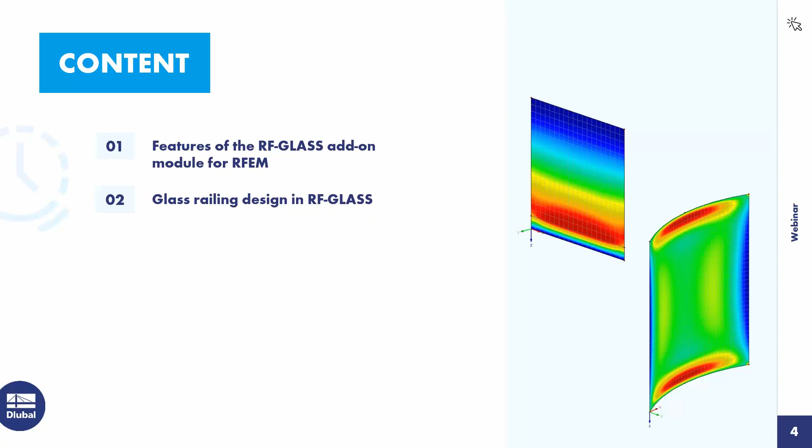To the agenda today. At first I will introduce some features of the add-on module RF-GLASS. Then I design a glass railing with the help of RFEM and the add-on module RF-GLASS, and then a curved insulated glass pane. So I start with the features of RF-GLASS. It's possible to design single layer, laminated and insulating glass, also curved glass. In the second example, I will combine curved glass and insulating glass.

You can consider the influence of the surrounding structure. I won't do that in this webinar. We did it in a previous webinar. There is a link here. If you have got interest in this webinar, point supported glass with the steel structure, you can click on the link when you downloaded the PowerPoint slide. Where you can find the PowerPoint slide, I will show you at the end of the webinar.

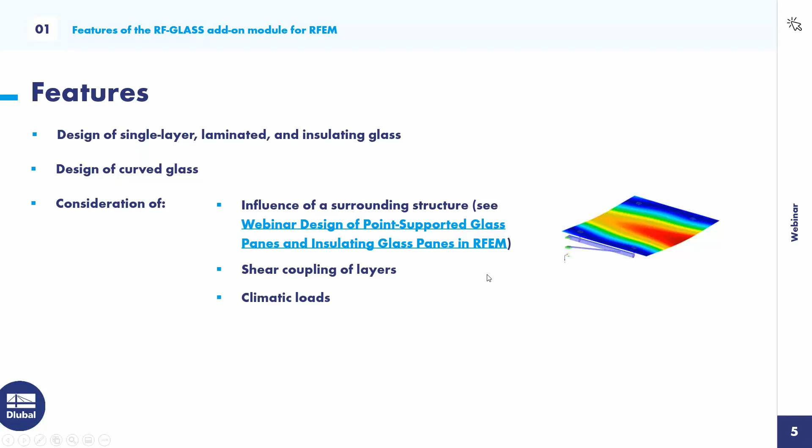So you can consider shear coupling of layers, climatic loads, for example, etc. And it's possible to do a stress analysis, the ultimate limit state design, and the serviceability limit state design. You can design independent from a code or with a code.

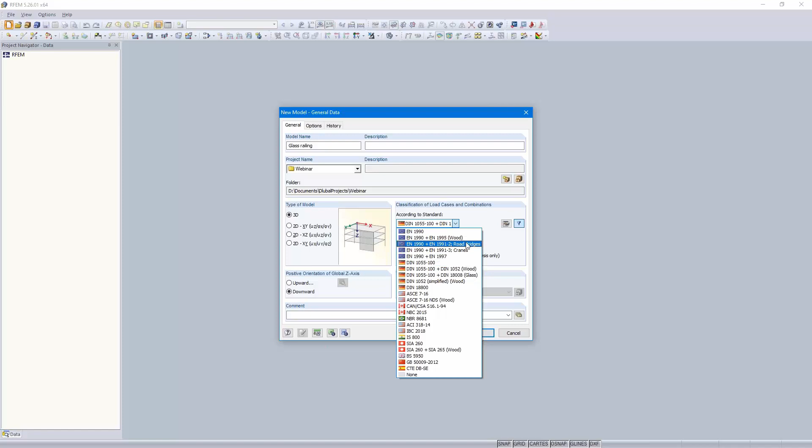So then we turn to the program. I start with a new model here, left above, new model. I call it glass railing. Then I want the program RFEM to create the combinations automatically. In that case, I would like to design according to DIN 18008. If you want to design according to another international standard, then use another standard for the combinations here, for example the Eurocode 0. Okay, that's all for the dialog.

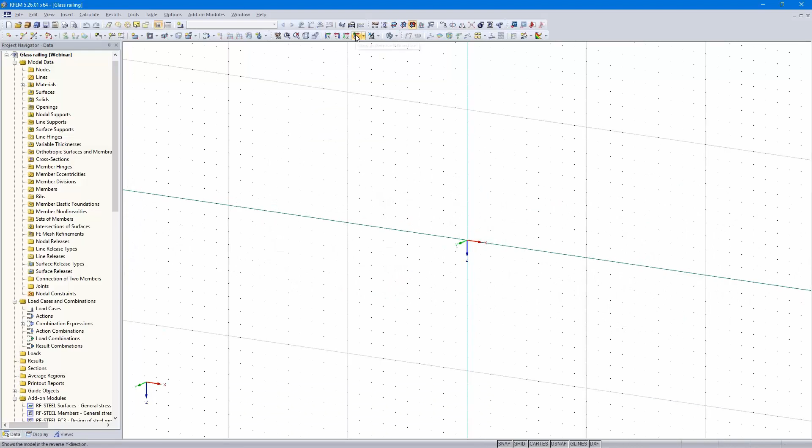I changed the work plane here right above to XZ and the view in -Y direction. So then I create the rectangular plate. The material and the thickness don't matter. They will be overwritten by RF-GLASS. Only the dimensions are important. Okay, 1 by 1 meters. Then I copy that line here in -Z direction, 10 centimeters. Later I will define line supports on that line and that line, and that's why we get restraint in that area here. Okay, the dimensions are okay.

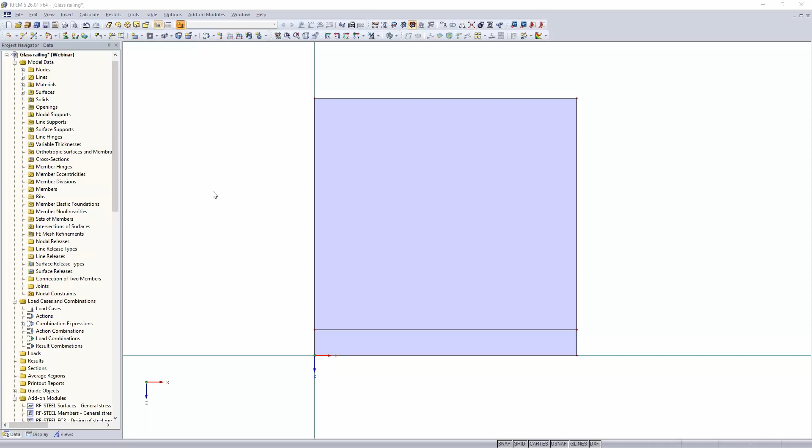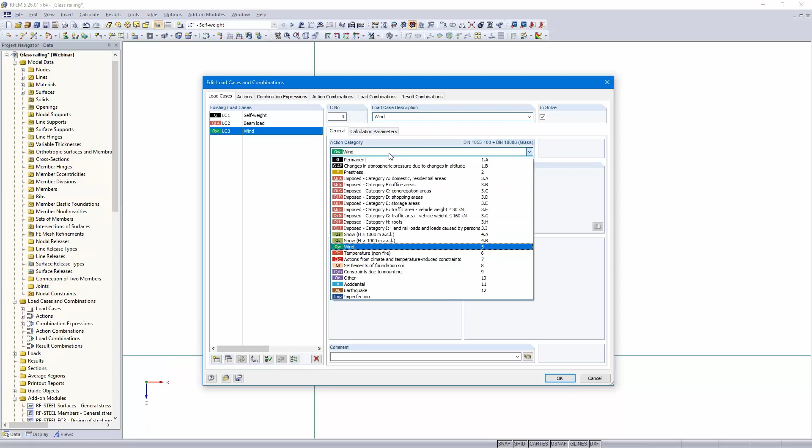Then I create new load cases. I start with the load case self-weight. Permanent is the action category. Self-weight is active, it's okay. Then the next load case, beam load. Yeah, imposed category, it is okay. And the next load case, wind. Action category wind. Yeah, and that's okay. Only 3 load cases, 3 actions.

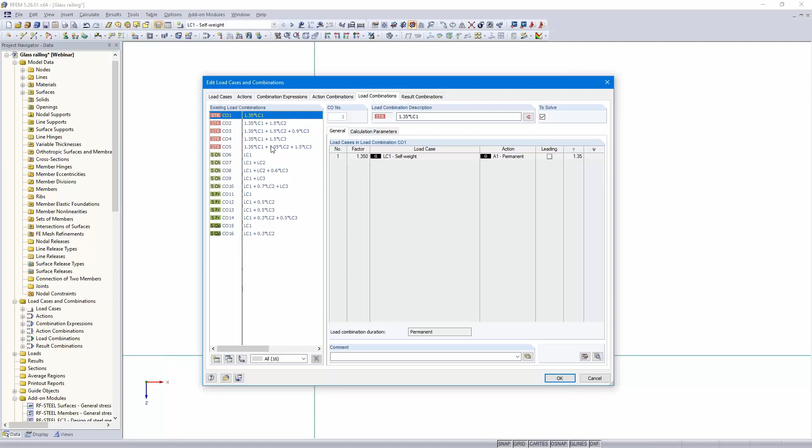Then here the combination expressions, 1 for the ultimate limit state, 3 for the serviceability limit state, action combinations, and the load combinations have been created, 5 for the ultimate limit state and the rest for the serviceability limit state. And all of them are combined in 4 result combinations, ULS as well as SLS 3 times. Okay.

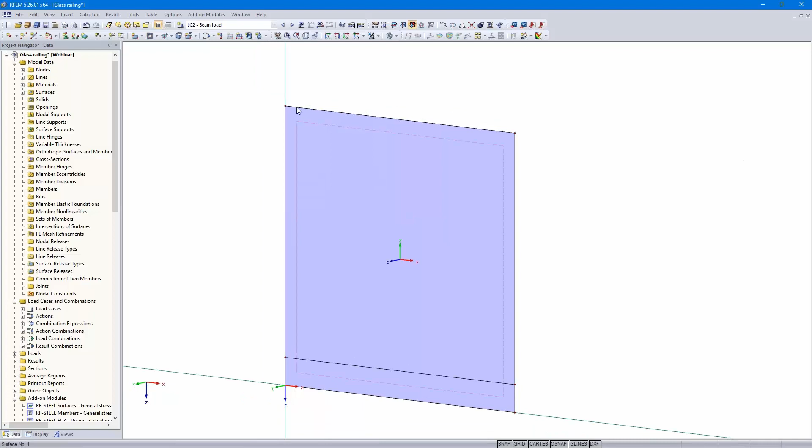That's all. Now we need to define the beam load and the wind load. Start with the beam load, the new line load in Y direction, 0.5 kilonewton per meter. And the wind load, the surface load in Y direction as well, 0.85 kilonewton per square meter. Okay, that's all for RFEM. We created the model, the load cases and 2 loads. And now we open the add-on module here under Others, RF-GLASS.

All surfaces, we've got only 1 surface. I would like to design according to the DIN code. And it's possible to design independent of a code. Then the existing stresses will be compared with the limit stresses.

Okay, then I select the result combination number 1 for the ultimate limit state design. For the serviceability limit state design, it's not necessary to design the serviceability limit state according to the DIN. It's not required for railings fixed on one side according to that code.

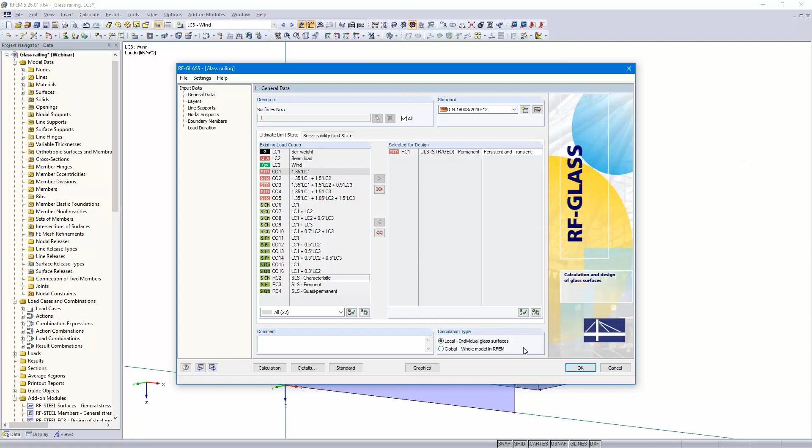Calculation type is local. We don't want to consider the whole structure in RFEM. We don't have any supporting structure. We use the local individual glass surface type. Then next dialog, the layers. For surface number 1, I start with the first layer, glass.

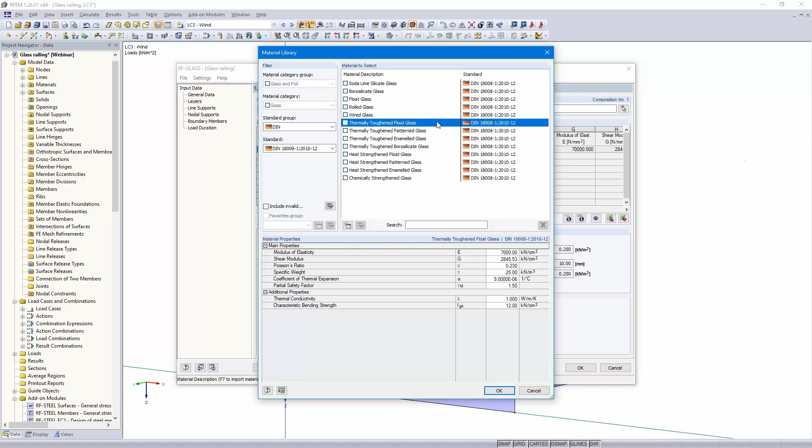I open the material library. Now there are a lot of glass types or materials. I use more than 1 in our webinar. For this example, I start with the thermally toughened float glass. And 10 millimeters is okay, thermally toughened and laminated safety glass.

Then next layer is the foil. I open the material library again and I use this one, PVB long time loading foil. Okay, the thickness is 1.52 millimeters, and the next glass pane. Okay, that's all.

The minimum requirements for an impact-resistant pane are fulfilled. Therefore, no pendulum impact test is required. No, we don't have to leave the dialog. I need to edit the composition details. It's possible to save created temporary models. I don't do that in this example, but in the second example.

I don't consider coupling. According to DIN, it's not allowed to consider shear coupling. But for other international standards, it's possible to consider shear coupling. So then, I forgot, I would like to activate the FE mesh refinement of 5 centimeters. And the rest is okay.

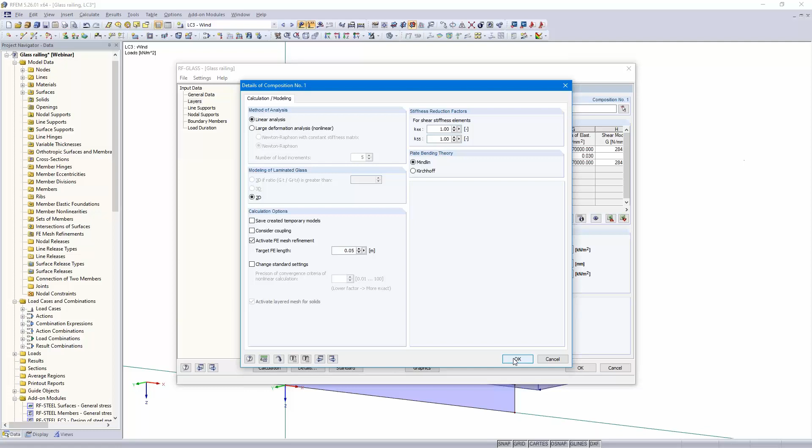So then the next dialog, line supports. I start with the first line, the bottom, okay. And I would like to support in all 3 directions. As you can see here, there are several support types, hinged types and rigid, and I use the user-defined type, not around Z direction, but in X, Y, Z, but with a spring constant of 10,000 kilonewton per square meter. That depends on the elastic support, for example, by the elastomer.

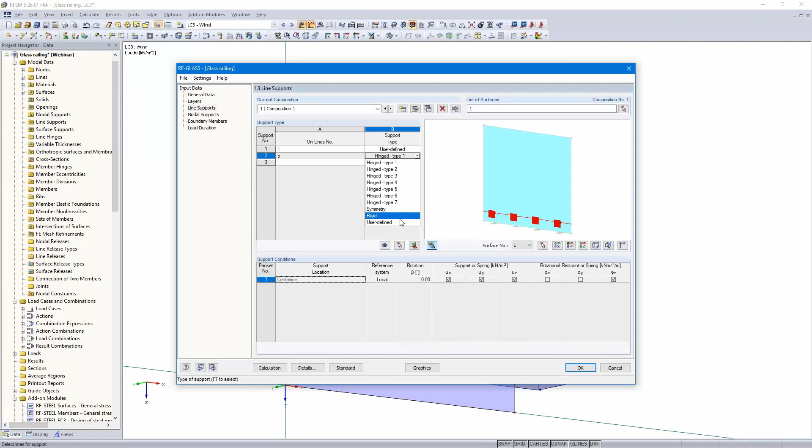Okay, so that's all for the first line. Then the next line, this one, and I would like to consider a horizontal support. That's why I showed the support axis system, and I would like to consider support in Z direction. The same spring. Okay. That's all for the line supports.

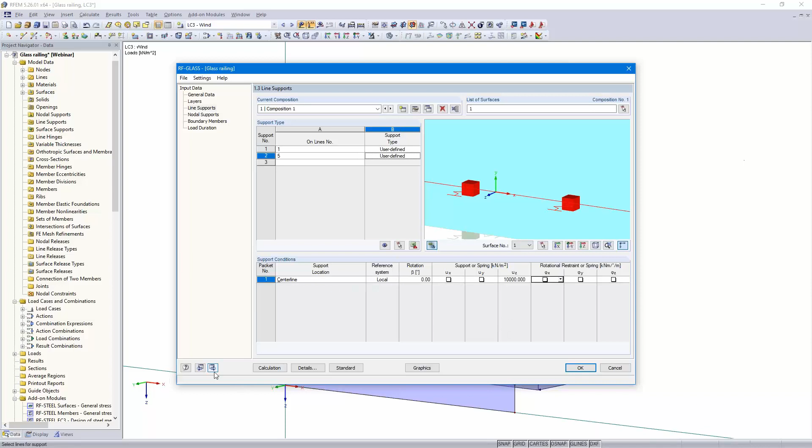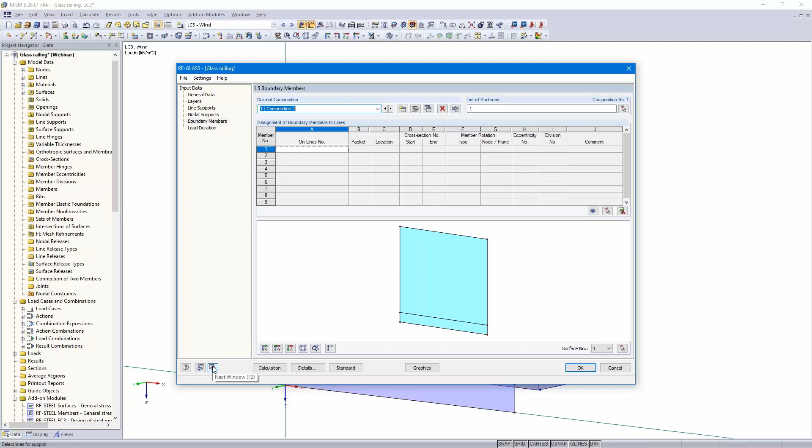Next dialog is nodal supports. I don't want to consider a nodal support in that example. I will do that in the second example. So then boundary members. It's possible to consider boundary members, for example, a handrail here. I don't do that. Load duration. The table is also filled automatically. So then we can start the calculation.

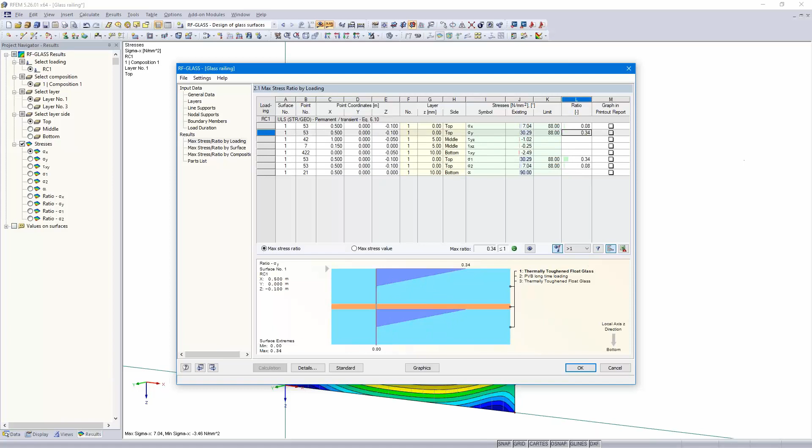So a design ratio of 34%. Let's take a look at the graphic. As you can see, the maximum ratio and the maximum stresses are in that area here, in the area of the restraint. Okay, we can print that in the printout report. Full page width and 50% of the height. It's okay.

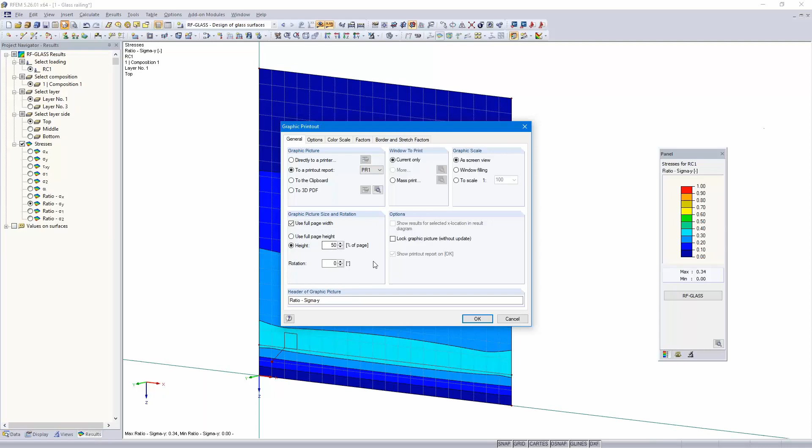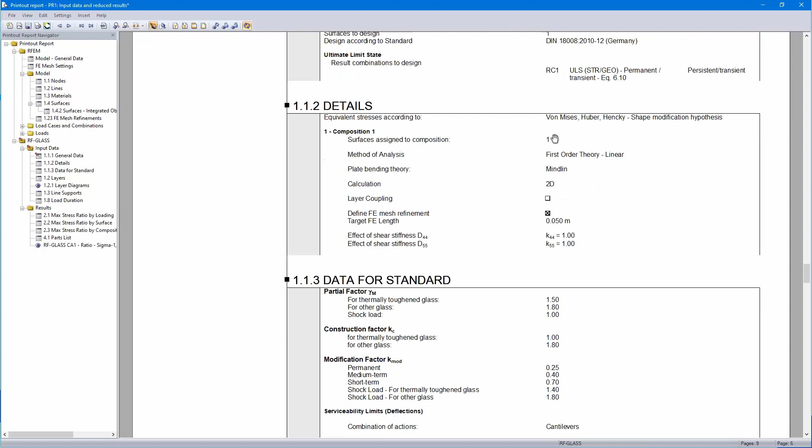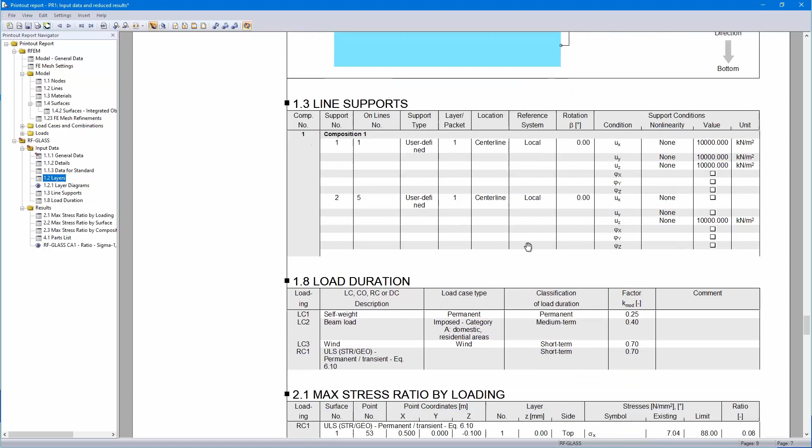So you can see the graphic here, but I would like to start with the general data of our glass. Here above, the standard, the result combination, details, the data of the standard. Important here, the layers with the material parameters, the layer diagram, the line supports, the load duration, and the maximum stresses. Okay, that's all for this model.

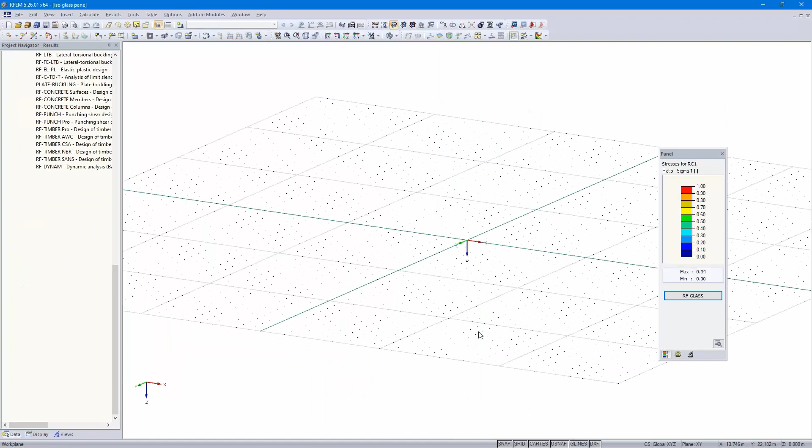I create a new one, the ISO glass pane. The same settings here. Okay, I change the view in Z direction. Then I change the grid by right-click here at the bottom, edit, to 25 centimeters. Okay.

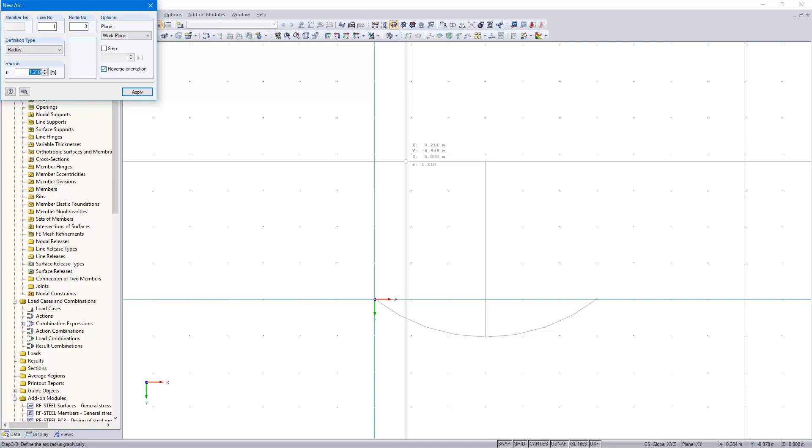So then here left above, an arc via edge nodes and radius. First point and the second point by 1.5 meters. Okay. I reverse the orientation and enter the radius of 1.3 meters here. Okay, that's the arc. And now I copy that line here in minus Z direction and create a surface.

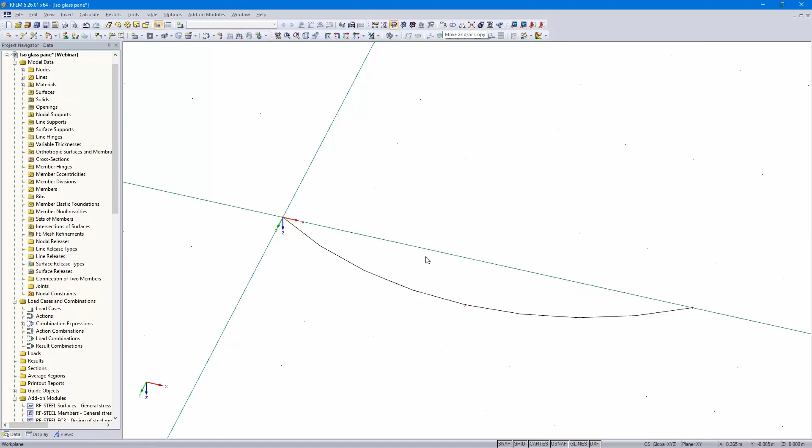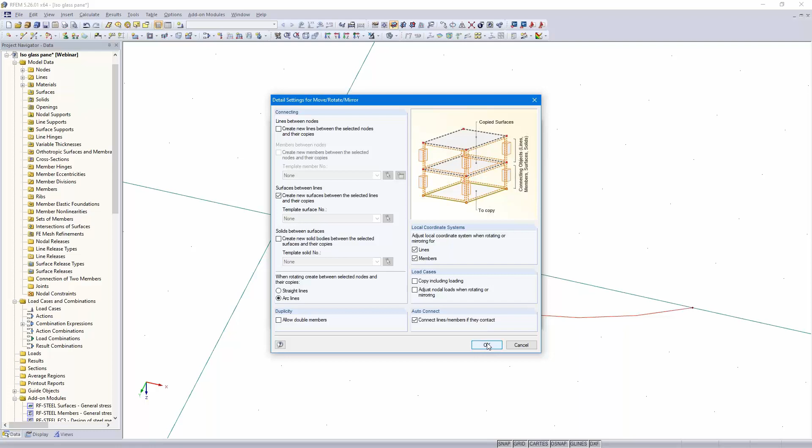So I select the line, then here move and/or copy. One copy in minus 1.7 meters, and I edit the expanded settings here at the bottom, and then I create surfaces between lines. Okay.

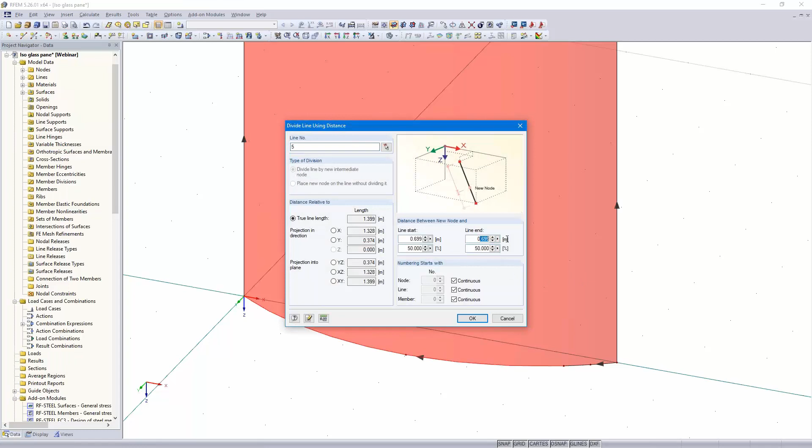Okay, then divide line by distance. Start 20 centimeters and end 20 centimeters. Okay, and that nodes here I would like to support. So then the model is okay.

I define the load cases. First the self-weight load case, then the wind. That's the right action category. Next load case, height difference. So I need to change the action category to changes in atmospheric pressure due to changes in altitude.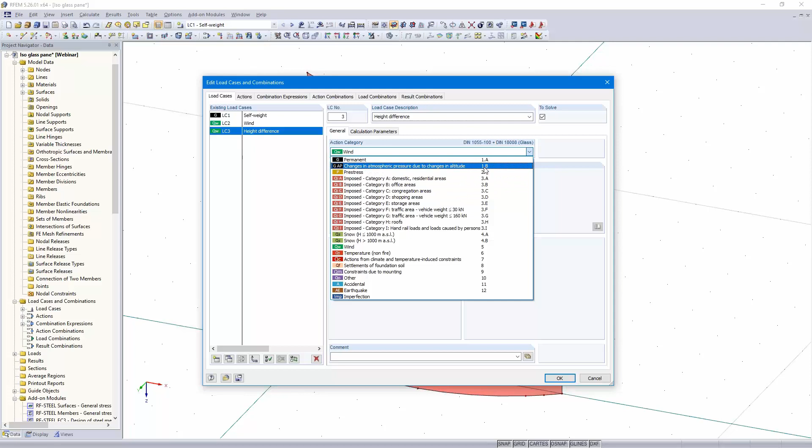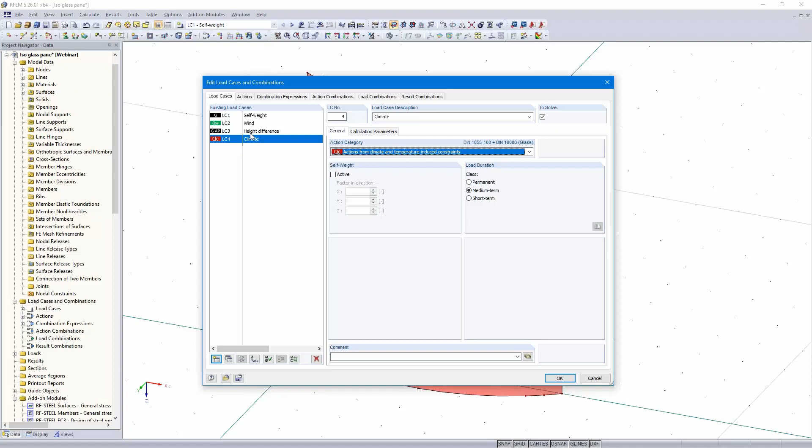So, and the fourth load case, climate. And then here actions from climate and temperature induced constraints. So when I leave the dialog, I don't have to forget the wind load, but the load cases 3 and 4 are placeholders to assign them in RF-GLASS. So the same combination expressions, then the load combinations have been created automatically, and the 4 result combinations.

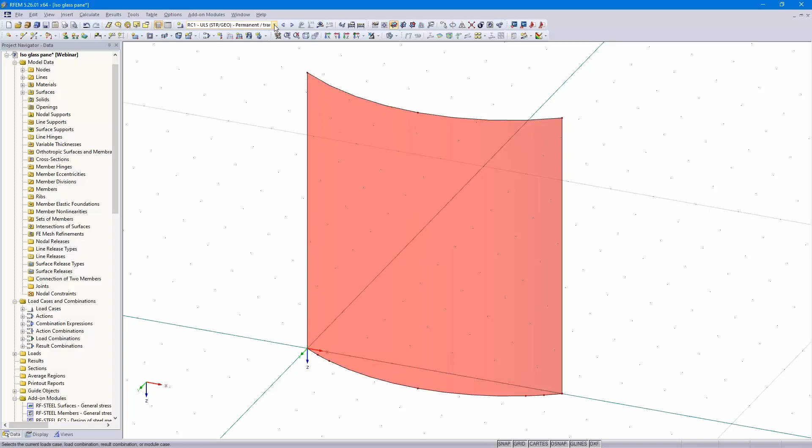So now I enter the wind load. So face load in local Z direction, 0.5 kilonewton per square meter. Okay. So that's all for RFEM. We can go in the add-on module.

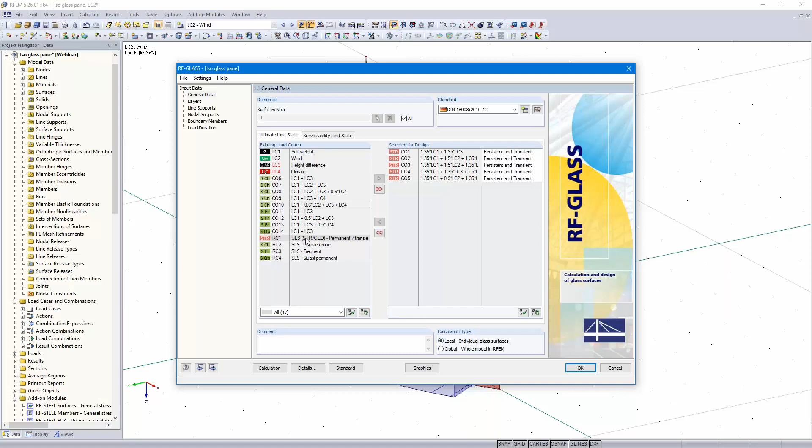So surface number 1, same standard. And I select the combinations for the ultimate limit state design. It's not allowed to use result combinations for insulated glass because of the explicit classification of the climate loads. So serviceability limit state design is the same. The load combinations for the serviceability limit state design. Local calculation type again, and we can turn to the next dialog.

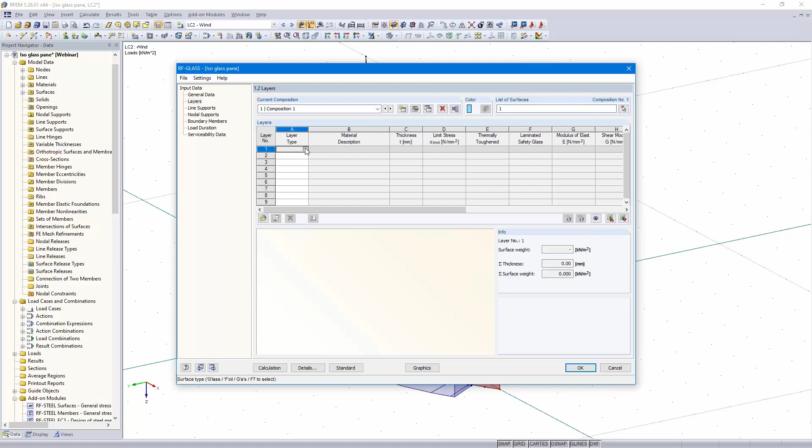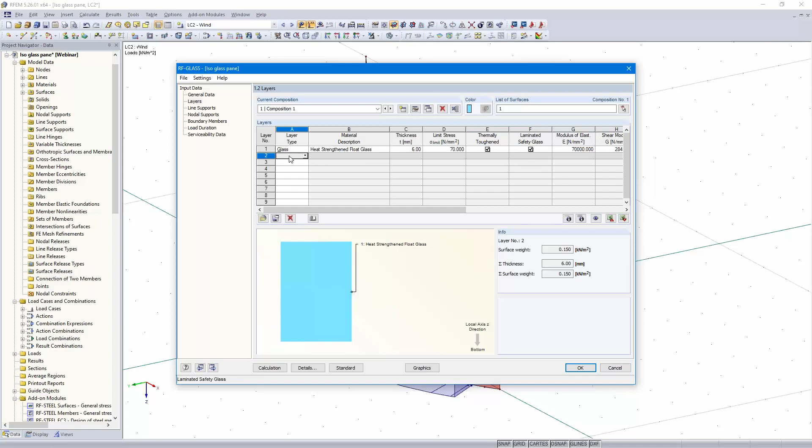The layers, surface number 1, and I start with the first layer, glass. This time heat strengthened float glass with a thickness of 6 millimeters, thermally toughened and laminated safety glass. So then a foil. This one is okay, but I changed the thickness. So next glass layer. Okay, and then the gas.

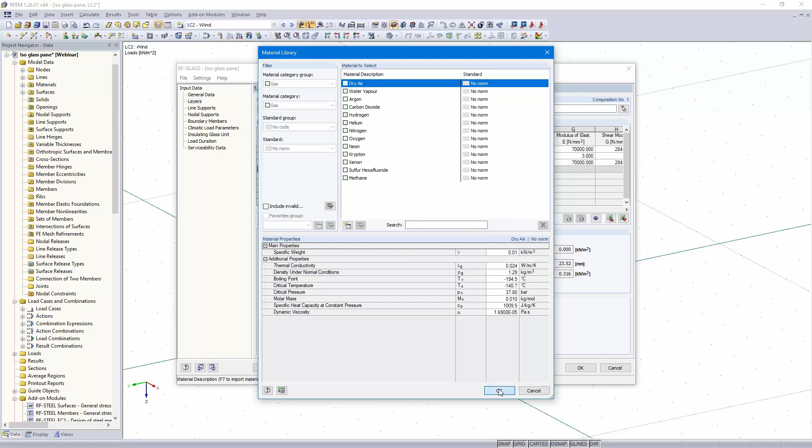Dry air is okay, but I would like to show you the material library. Dry air, but you can also use, for example, argon or krypton, etc. So thickness 16 millimeters. Then the glass in the middle. Float glass this time. 3 millimeters. And I can uncheck this. Then dry air as gas.

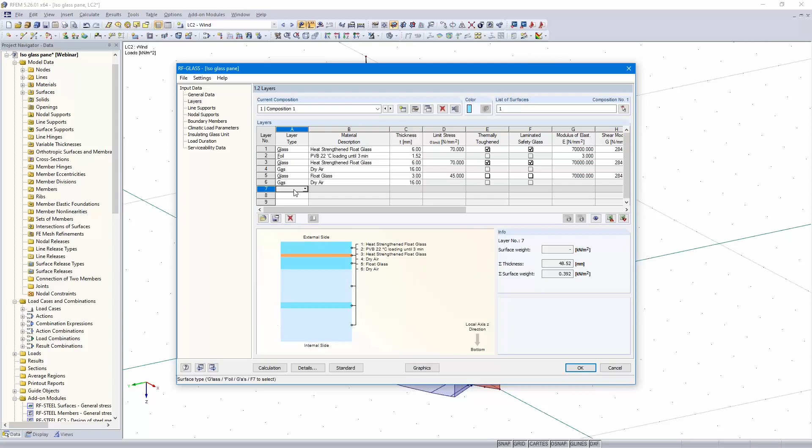Next glass layer. Heat strengthened float glass. The foil. And the last layer, the glass pane. Okay, let me check the entries. Here's the wrong thickness, 6 and 6. Okay. In the graphic you can see the single layers, glass, foil, glass, dry air as gas, glass, dry air, glass, foil and glass.

Okay, let me check the composition details. As I promised, now I save the created temporary models. I don't consider coupling again. I activate FE mesh refinement and I can deselect this. The rest is quite okay.

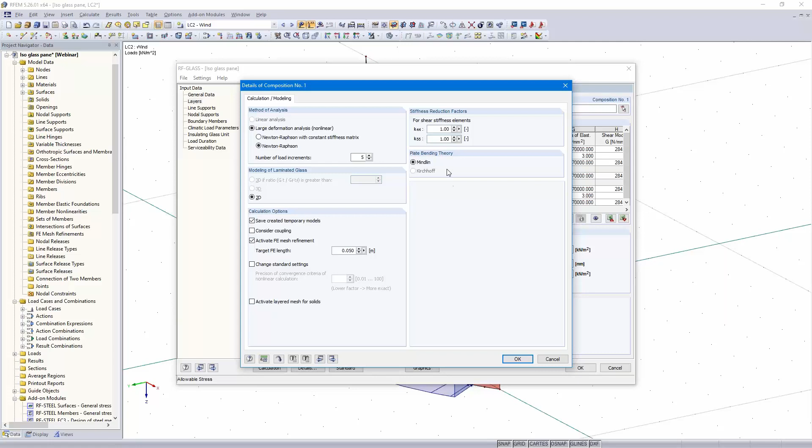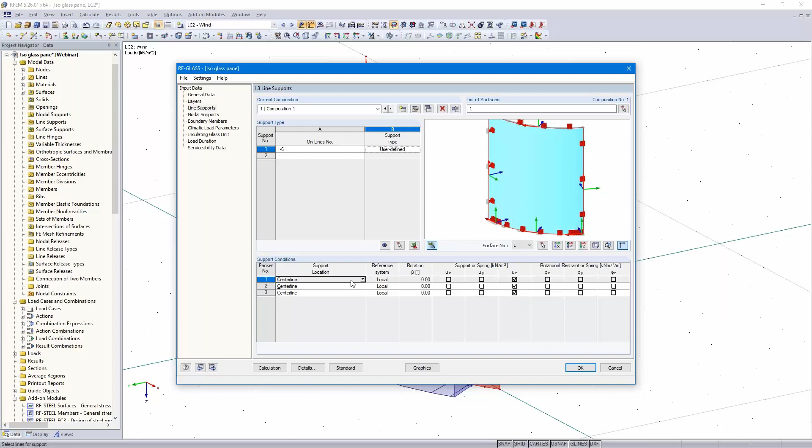Then next dialog, line supports. I would like to support all lines in horizontal direction. I select here user defined. In Z direction I would like to support. So, and we need to define this 3 times for this packet on the outside, in the middle and inside. Okay, that's all.

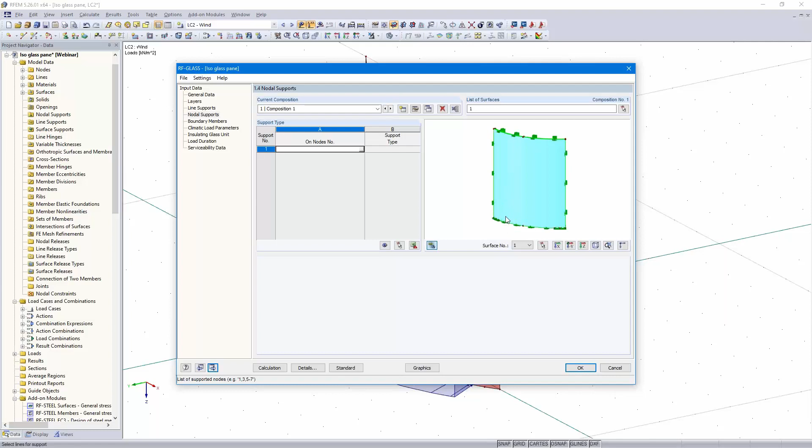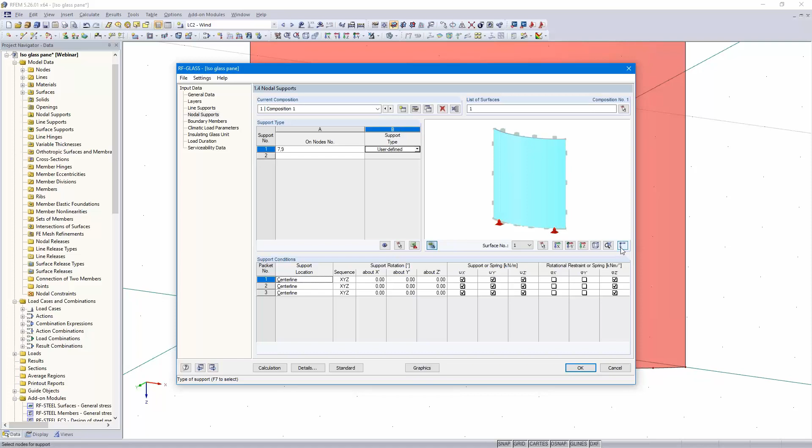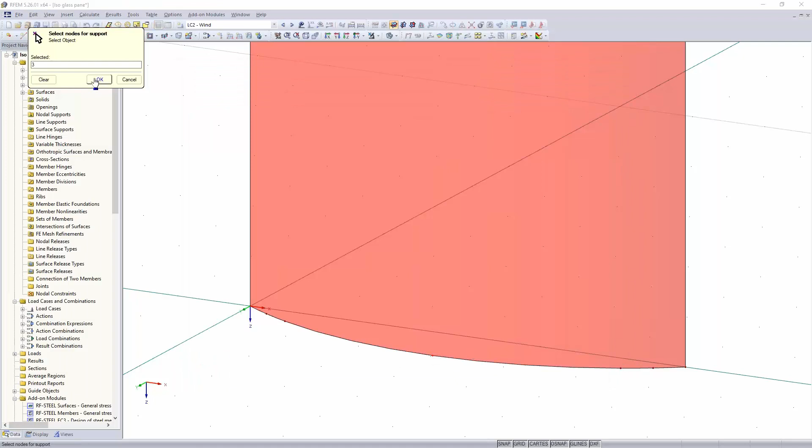Next dialog, the nodal supports. I would like to support the structure or the glass pane in vertical direction in these points here. So I select the first 2 points. This one and this one. User defined. In local Z direction. Okay, and the support in the middle here. Okay, user defined as well, and I would like to support in X and Z direction. Okay, that's all.

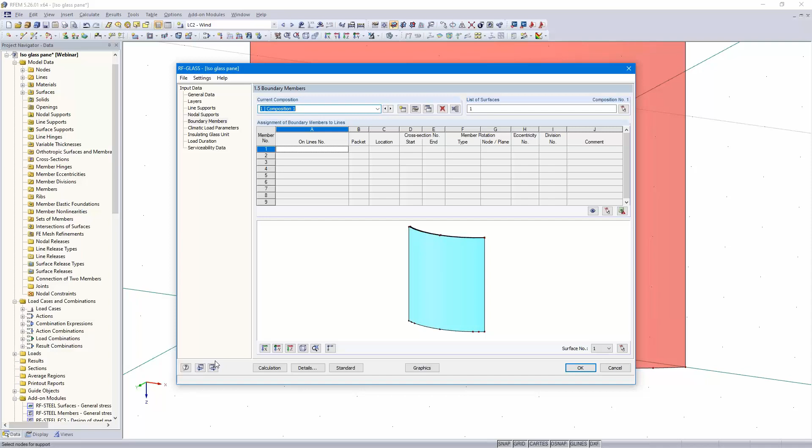Next dialog, boundary members. Yeah, I don't consider boundary members, but we need to define the climatic load parameters. The default values according to the standard are present. If you want to design according to another standard, then you need to modify the entries here. I only need to assign the correct load cases here. Load case number 4 and here load case number 3. Okay, the same for the winter.

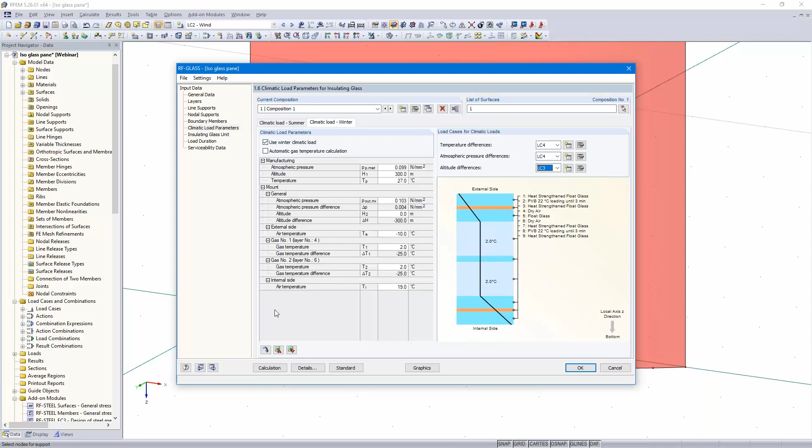Load case number 4, 2 times and 1 time. Load case number 3. So that's all for this dialog.

Next dialog, insulating glass unit. You can consider secondary seals here. I don't do that in this webinar. Maybe some words to this area or this table. Self-weight and climatic loads are automatically assigned in the right place.

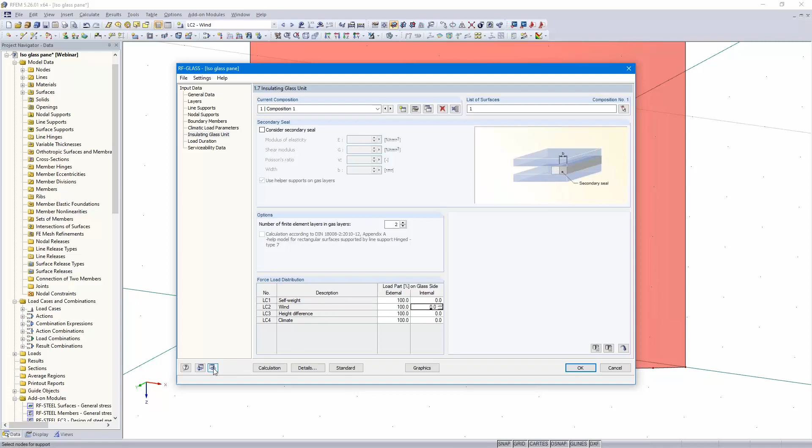However, if wind suction acts in addition to wind pressure, you have to define the load component here. You need to modify this value and this value. We have got only pressure from the outside, and that is why it is okay here. The load duration class is assigned automatically.

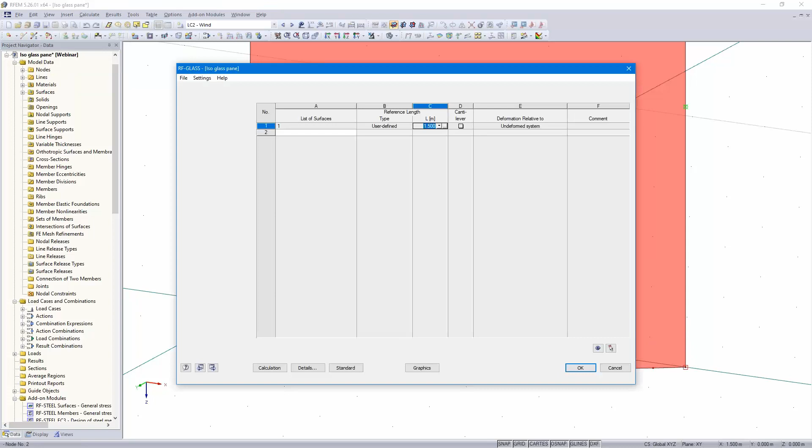Last dialog, the serviceability data, list of surfaces, surface number 1, not the minimum boundary line. I select user defined and I measure the distance, 1.5 meters. Okay, the entries are complete.

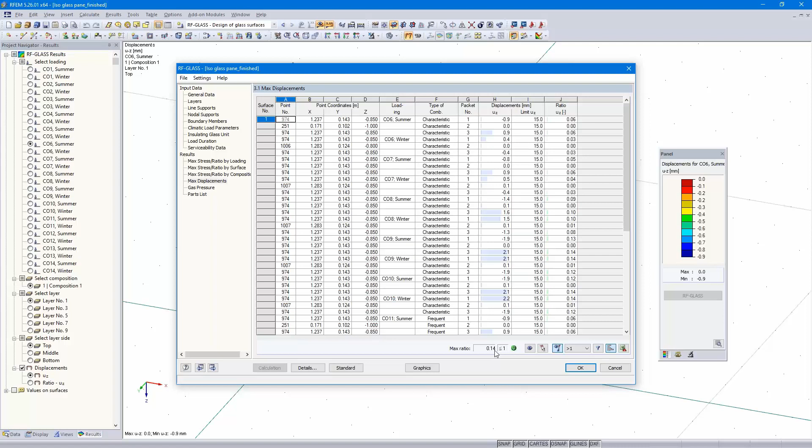I would like to skip the calculation time and open an already calculated model. I've got the maximum ratio of 92%. Let's take a look at the maximum displacements. Maximum design ratio of 14%. The glass pane is quite stiff.

So let's search for the maximum design ratio here, sigma x, and we open it in RFEM. As you can see here on the left side, load combination 5, winter, has got the maximum stress and the maximum design ratio here at the top and at the bottom, that area in layer number 1.

Now we can open the printout report again. Where are more data now? Should take some seconds. Might take quite long, maybe through the GoToWebinar software. So, okay.

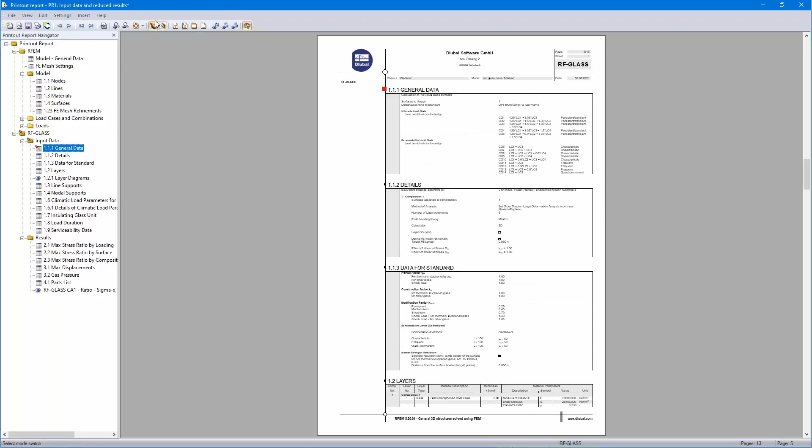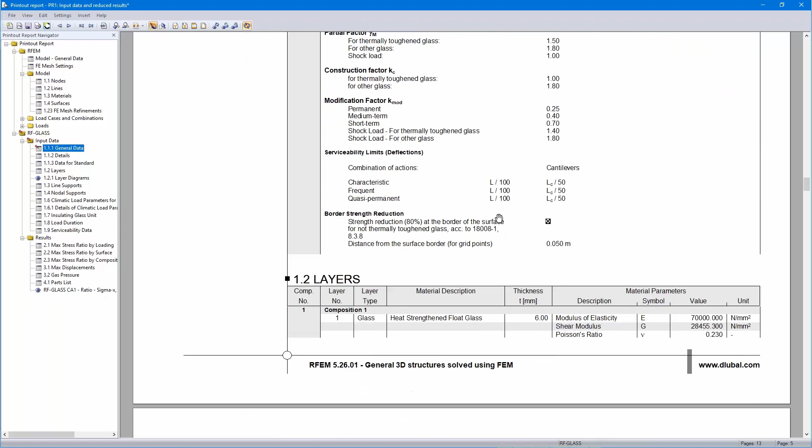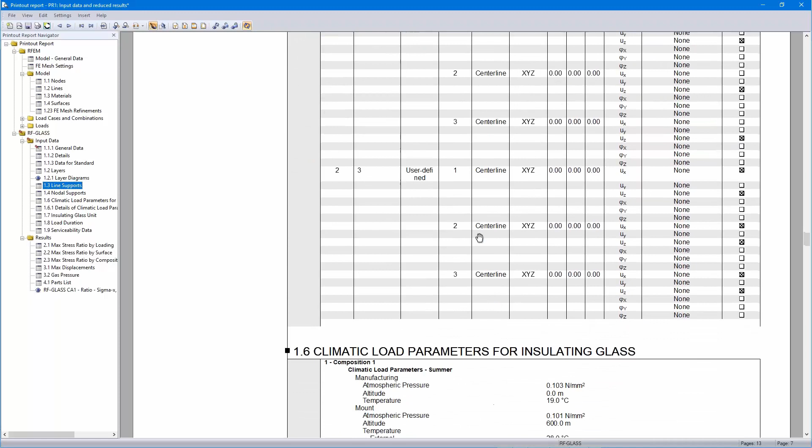Let's start here with the input data, the full width, general data with the combinations, the details, data for standard, the single layers with the material parameters. Important are also the layer diagrams, the line and nodal supports, the climatic loads. All is integrated in the printout report. And here the graphic. Okay.

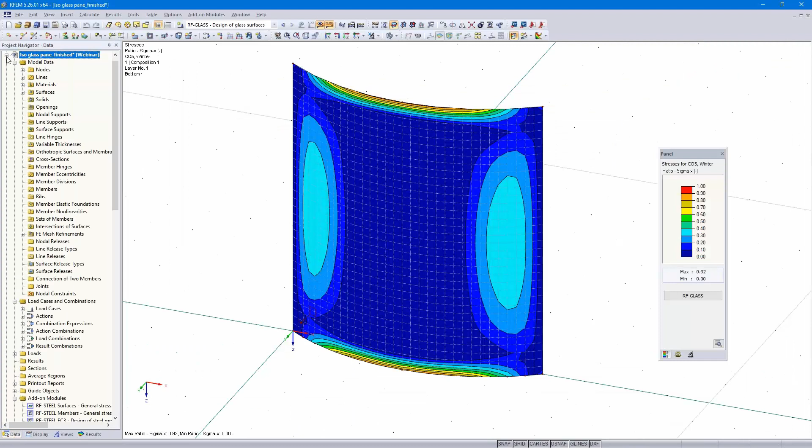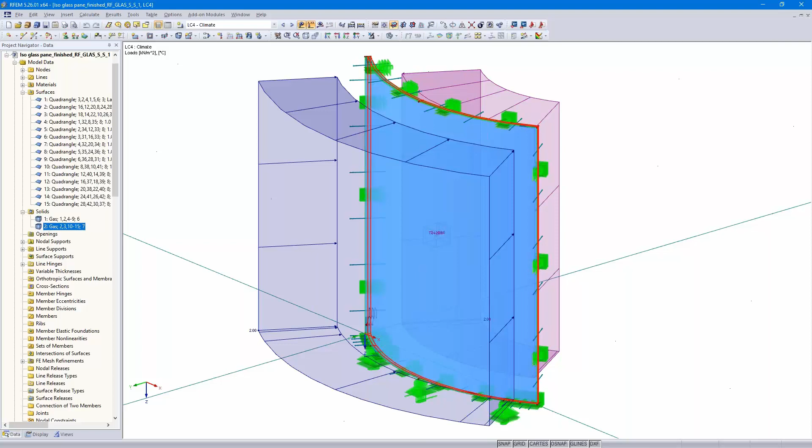I would like to show you one of the temporary models. As you can see, it's quite detailed. You can see the glass panes here, the solids, the gas solids, the single supports, line supports, the nodal supports. Here are line hinges.

And now the two load cases 3 and 4 have got loads. The surface load, then load case number 4 has got the surface loads, and here the solid loads. RF-GLASS uses these temporary models in the background for its calculation. And if you check to show or to create the models, then you will see them in the same folder of your model. Okay, that's all to this example.